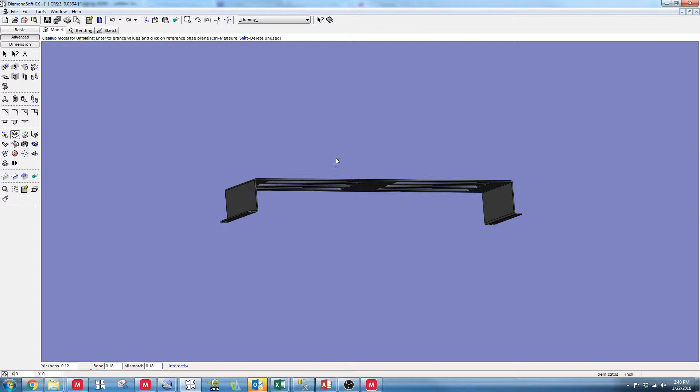Now once this comes in through the import, the first thing we've got to do is essentially tell it where our bend surface is and what it is, how thick, what material, because it doesn't have any properties when it comes through from SolidWorks.

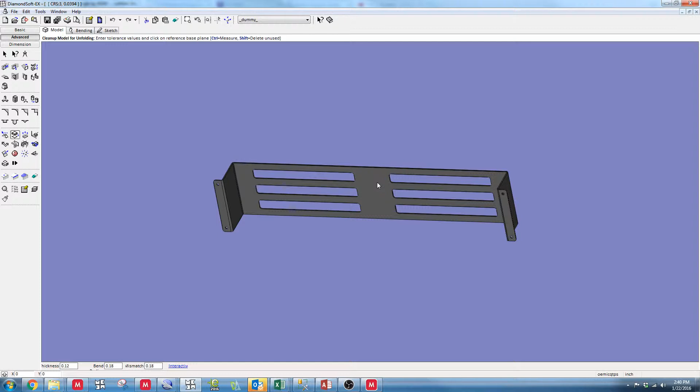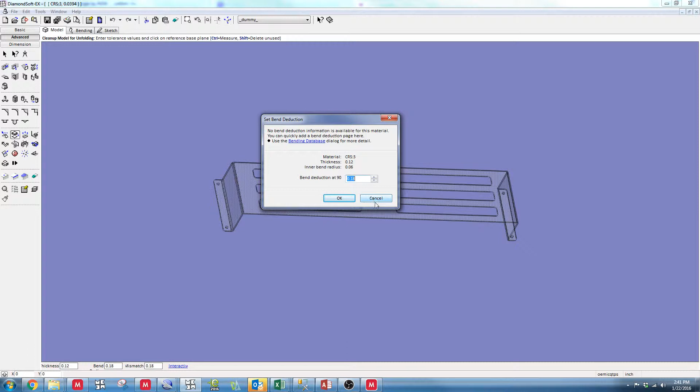So the first thing we do is we'll grab this, it's called Cleanup Model for Unfolding. We'll click on this, and we always click the surface that the bend is going to be performed on. So you're instantly going to get this box up that says, hey, this is what I am, CRS, this is how thick I am, and these are the properties that I was at when I was in SolidWorks. We're going to disregard that, we're going to use our own stuff within the MetaCam, so we're going to cancel that.

And then we're going to come down here to the layer setup. We click this, select the topmost level of the part. We're going to choose the aluminum because we know that's what type of material it is. The thickness is going to be 11 gauge, so you can see that rolls down through all of it.

The machine, we leave that, and then the Denner Elite press brake should already be there for you. Some of these options down here are used if you get to a point where, let's just say there is a countersink part in the model, you can skip that for unfolding. It'll help you get through a few errors. This doesn't have anything like that, so we look to be pretty good to go.

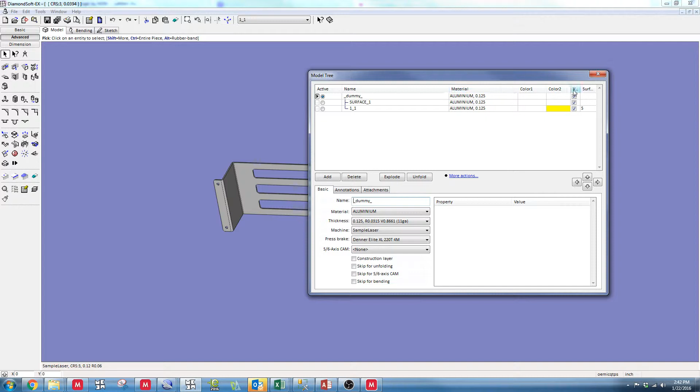We'll close that, and then we'll hit bending. Now if you have errors in your model, you will get an error and it won't let you proceed into this bending tab. So we bring it in.

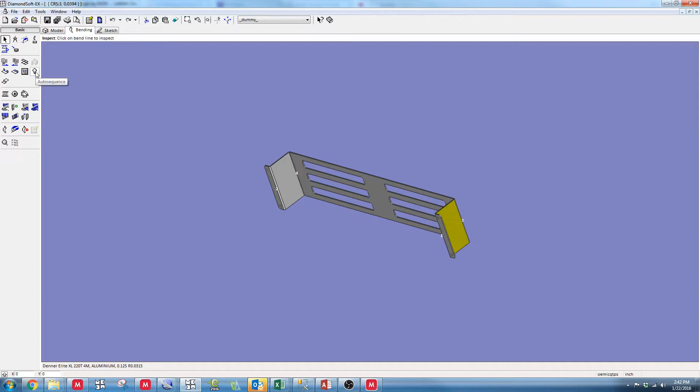It's telling us it's going to decide to do 1, 2, 3, and 4 because it thinks that's the best, and we'll go with that. So first thing we do is we grab the auto sequence. We select our tooling, which is going to be, at this point, since we don't have any mating bends perpendicular to each other, we're just going to choose standard, and we hit OK.

Kind of flattens itself out. Each 1, 2, 3 looks like we've got a punch and a die. Now we can grab this bend overview box and bring it up. So this is kind of the status of each bend, punch and die. So everything's checked good.

Deformation down here on 1 and 3, so it's kind of just giving you a heads up. It says, hey, the holes are pretty close to the bend line, you could see some deforming in that area. So can't really do too much about that. Usually when we get out on the floor, it's usually fine.

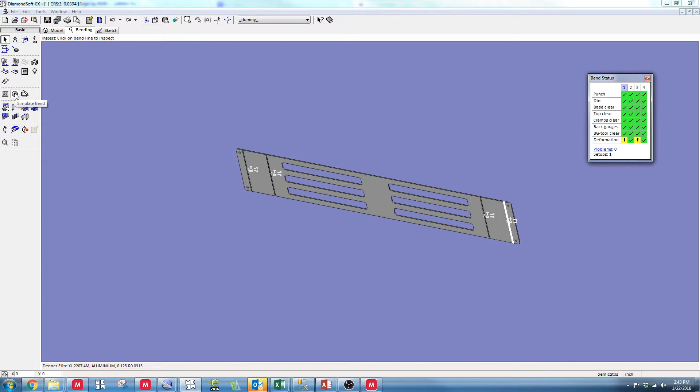And then we're going to come in here and do a simulate bend, the play button. And you can see right now what it chose for us is a basic 835 length die, which is a V22, and then a 415 punch 1281 standard. So that's pretty much our standard stuff that we've got out there.

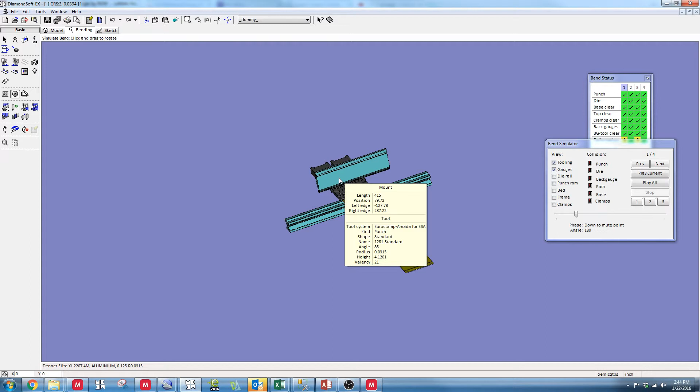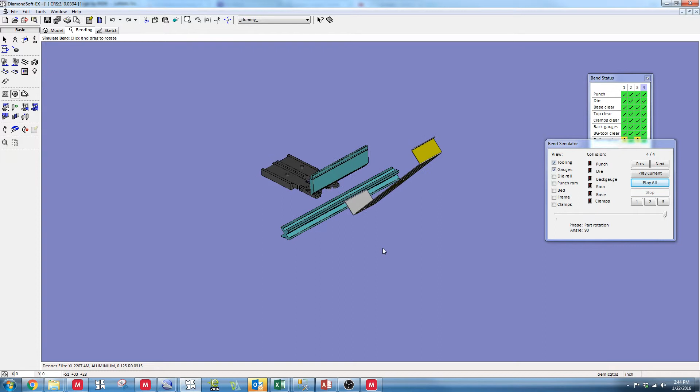I'm just going to hit play, and it's going to show us where we're at. You can see the back gauge is moving to position each of the bends. And then, no issues, no crashes, nothing of the sort.

And again, you can put as much of this machine in here as you want, so you can kind of get a visual of what is going on. So no collisions, no issues, we're pretty much good to go.

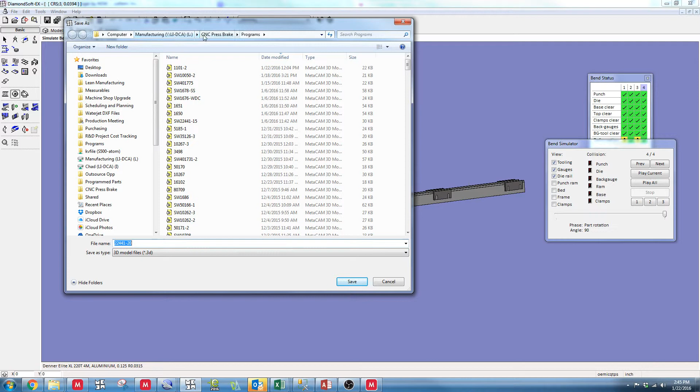So at this point, we're going to save this file, and I'm going to save it on my desktop just because we already have a file created in there for that. But when you do save that file, it's manufacturing CNC press brake programs. So we save it first.

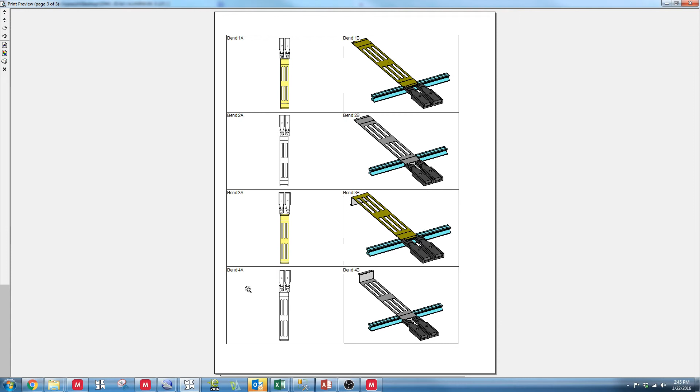Second step would be to go ahead and come up here to the print preview, and that will give the breakdown of what this bend program is, gives us the lines, talks about the dies, which ones we're using, and then again walks the operator through the steps of orientation of what he's doing. We print that.

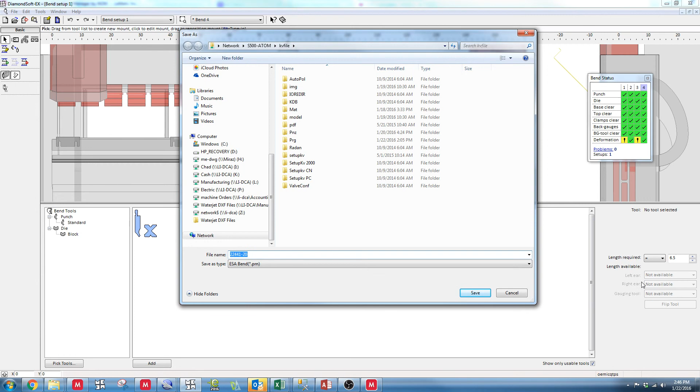And then the third step is going to be to send the code out to the machine. So generate NC code is here, and we hit that button, and we get into this. This is what it should look like. It should have the file name here, network 5500 atom kvfile, and then we hit save. Once we save, it'll push all of this information from this program out to the machine.

That's it, that's the simple process. If there's no errors, clean, easy bend on how to process it through the SolidWorks from the engineering department right out to the floor. Thank you.